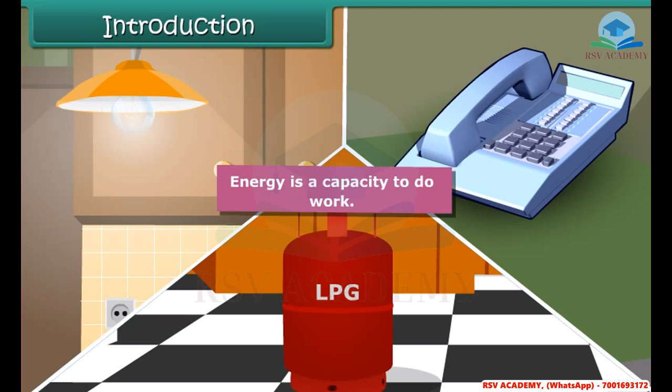Can you imagine life without these devices? All these devices consume energy. We also need power for industry, agriculture, transport, and communication. So power or energy plays a vital role in our lives.

Objectives. At the end of this lesson, you'll be able to differentiate conventional and non-conventional sources of energy, and explain the importance of using non-conventional sources of energy.

Conventional sources of energy: Coal. We have seen that power is required to run daily use items. Power resources are broadly categorized as conventional and non-conventional resources.

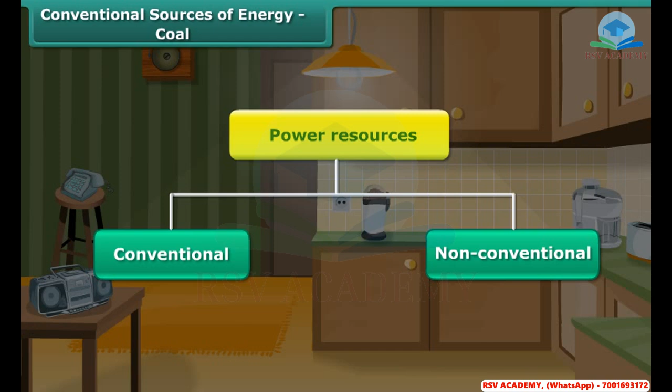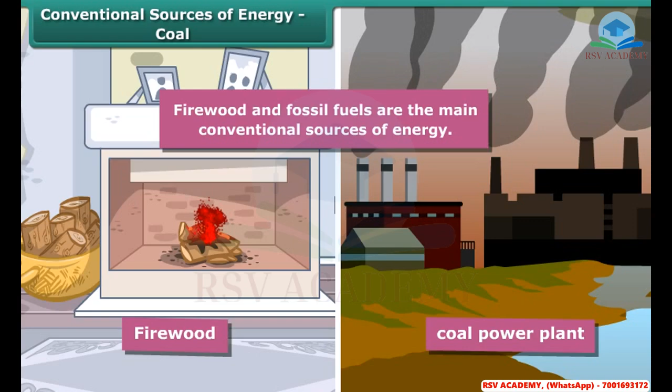Conventional resources of energy are those which have been in use for a long time. Firewood and fossil fuels are the main conventional sources of energy. Firewood is widely used for cooking and heating in villages. It is obtained from cutting of trees.

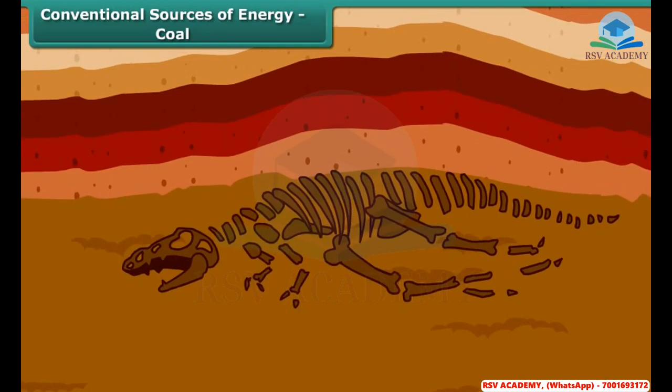Millions of years ago, remains of dead plants and animals were buried under the earth. On application of heat and pressure, they got converted into fossil fuels. Coal is the most abundantly found fossil fuel, which is used to generate electricity called thermal energy.

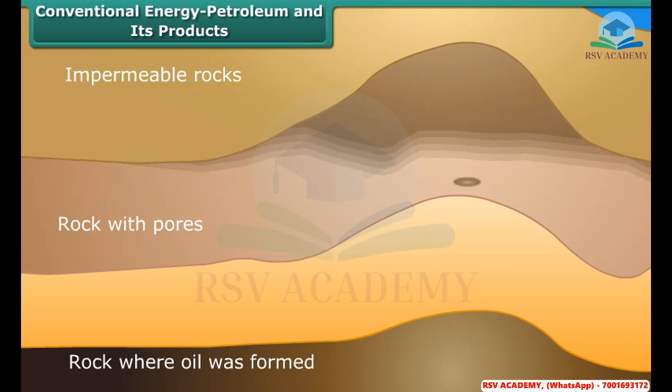Conventional energy: petroleum and its products. Petroleum is found between the layers of rocks along with natural gas and is drilled from oil fields located in offshore and coastal areas. The crude oil is sent to refineries for processing. Diesel, petrol, kerosene, wax, plastics and lubricants are obtained from petroleum refining.

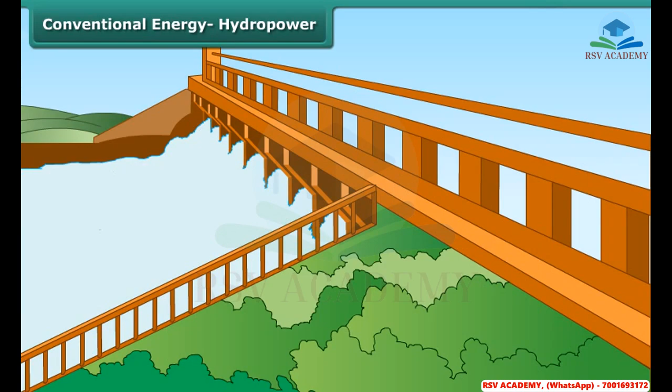Conventional energy: hydropower. Children, do you know water is another very important energy resource? It helps in generating electricity. But how? Rainwater or river water stored in dams is made to fall from heights, which moves the turbine blades. The moving blades then turn the generator to produce hydropower.

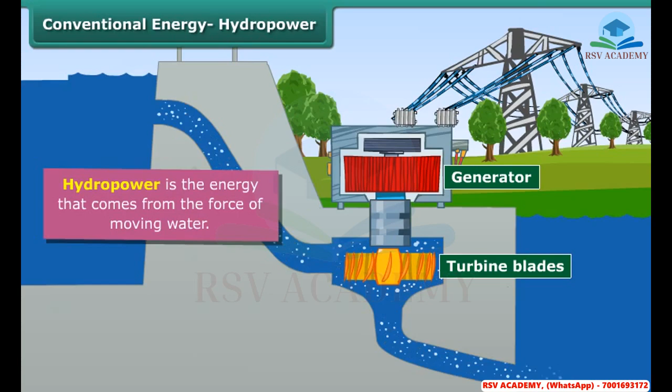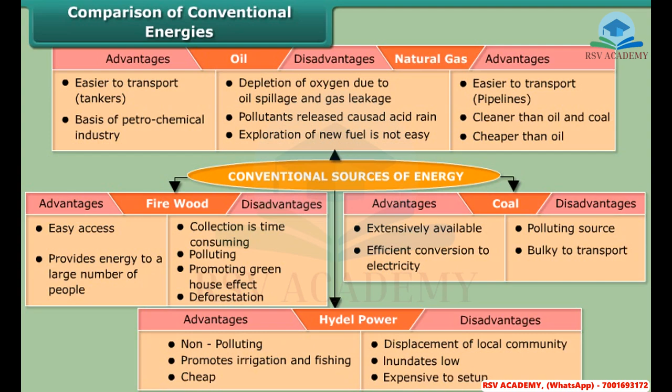Comparison of conventional energies. Let us compare the advantages and disadvantages of conventional energies. Since the increasing use of fossil fuels is leading to its shortage, there is a need for using non-conventional sources of energy. But before that, let us check your understanding.

Non-conventional sources of energy. Let us see what are the non-conventional sources of energy. Non-conventional sources of energy are the energy sources that are natural, inexhaustible, as well as renewable.

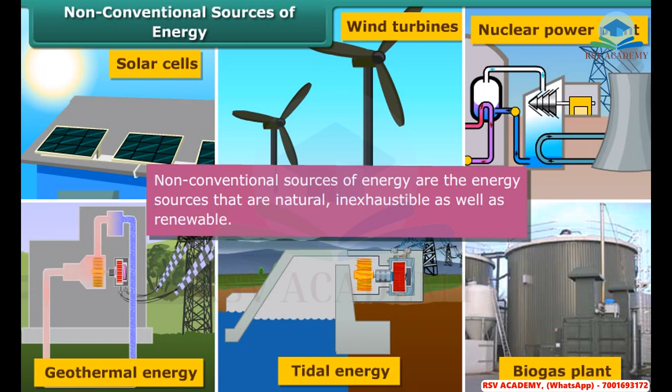Solar energy, for example, is a non-conventional energy. Many solar cells are joined into solar panels to generate electricity. Solar energy is also used in solar heaters, solar cookers, and solar dryers.

Do you know even wind can also help in generating electricity? The high-speed winds rotate the windmill, which is connected to a generator to produce electricity.

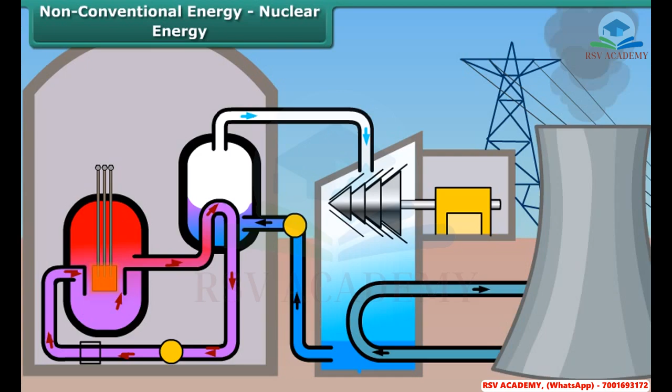Non-conventional energy: Nuclear energy. Nuclear energy is the energy that is stored in the nucleus or center core of an atom like uranium and thorium. These fuels undergo nuclear fission in nuclear reactors and emit power.

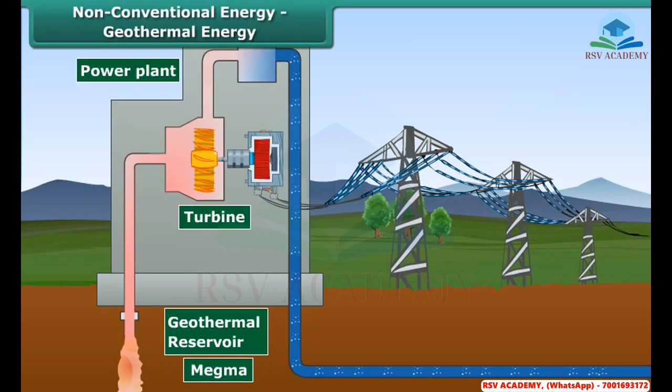Non-conventional energy: Geothermal energy. You will be surprised to know that Earth's heat is also a type of energy called geothermal energy. The temperature in the interior of the Earth rises steadily as we go deeper, and this heat energy can be used to generate power. Geothermal energy in the form of hot springs is also used for cooking.

Non-conventional energy: Tidal energy. Do you know what is tidal energy? It is the energy generated from tides. During high tide, the energy of the tides turns the turbine blades in the dam to produce electricity.

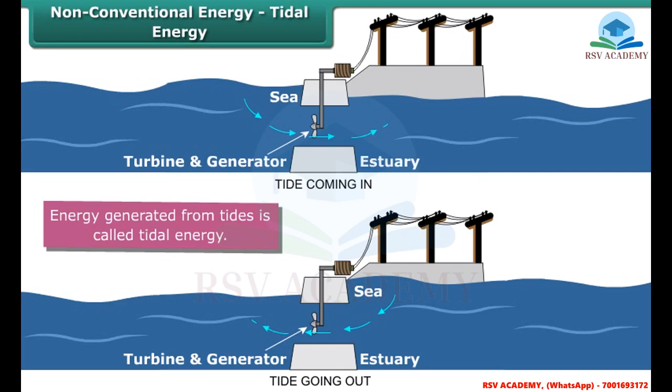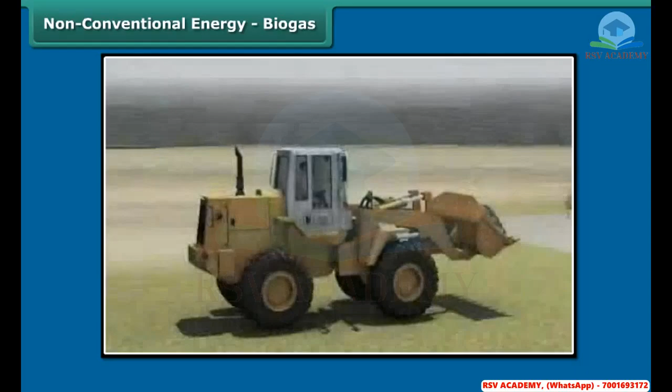Non-conventional energy: Biogas. Biogas is another non-conventional energy which is a mixture of methane and carbon dioxide gas. Organic waste such as dead plants, animal dung, and kitchen waste is decomposed by bacteria in biogas digesters to emit biogas. It is an excellent fuel for cooking and lighting purposes.

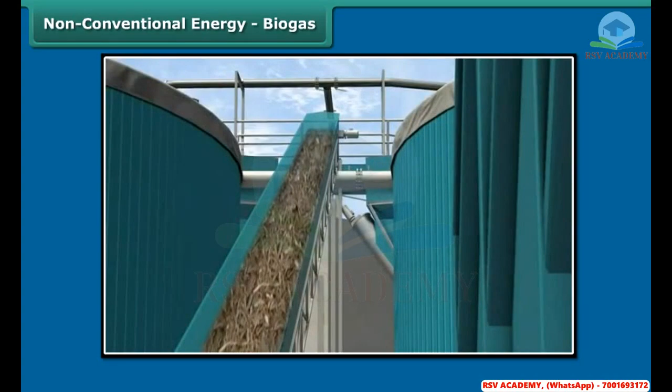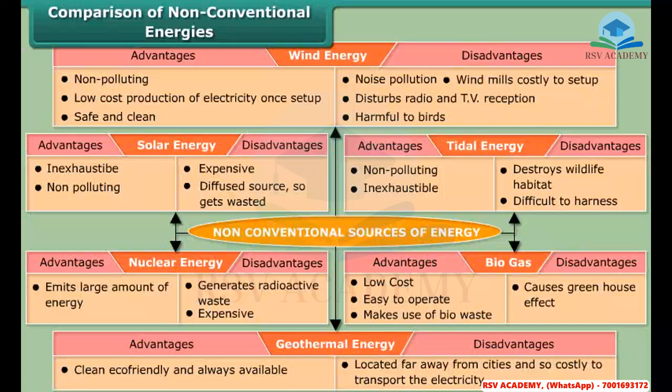Comparison of non-conventional energies. Let us compare the advantages and disadvantages of non-conventional energies.

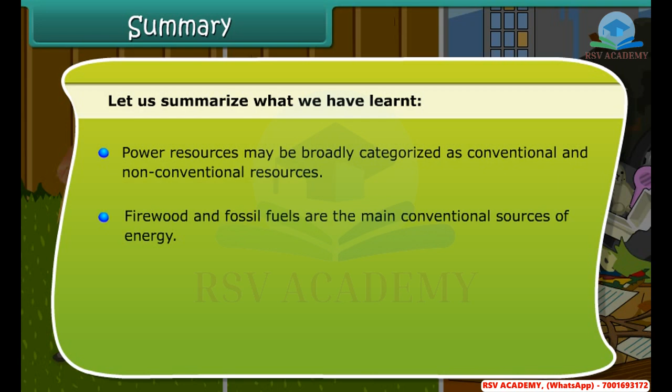Summary. Let us summarize what we have learnt. Power resources may be broadly categorized as conventional and non-conventional resources. Firewood and fossil fuels are the main conventional sources of energy. Solar...